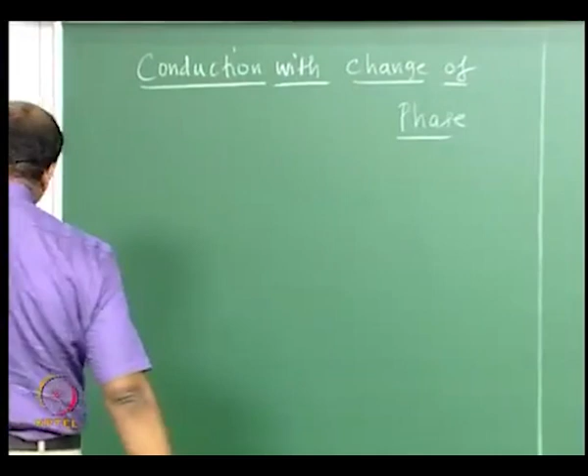As you can very well imagine, melting and solidification take place in a variety of situations in life: melting of ice, making ice cream, processed food, dairy industries, preserving blood in the blood bank. There are many applications, from ice cream making and so on.

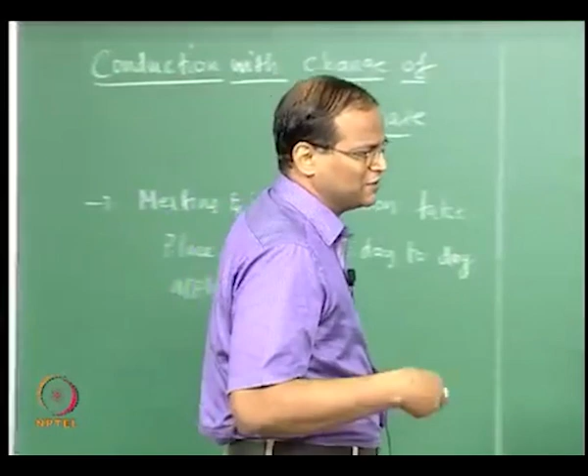Melting, solidification and freezing occur in a lot of applications. As far as metallurgy is concerned, it is full of melting and solidification, where depending on the heating rate, heat treatment is involved - of course heat treatment may not always involve change of phase, but sometimes it does. In metallurgy they also have phase transformation, austenitic stainless steel, martensite and so on, so they are obsessed with this melting and solidification problem.

As far as heat transfer is concerned, more than melting and solidification, change of phase from liquid to vapor and vapor to liquid frequently occurs in heat exchangers.

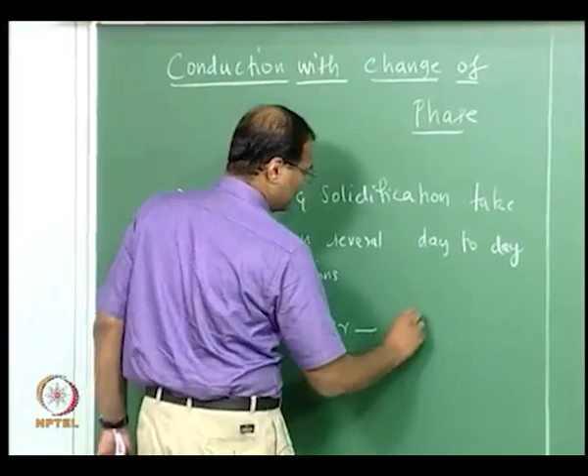Most importantly, latent heat storage devices - you want to store solar energy using phase change material, using paraffin or something. So what happens is you collect the sun's rays, you heat water, this water is circulated in tubes inside a tank. In this tank you have paraffin or wax, the heat is transferred to it, so from solid it becomes liquid, and it stores energy like this.

Then during the night you again send the same water through these tubes, but that water will be cold water and it will get hot - you will get hot water. So one may ask, what is the big deal, why do you want to complicate things, why do you want to use paraffin, wax and all that?

The simple logic is that the melting heat, the latent heat, is much more than the specific heat, and latent heat transfer takes place without any temperature difference. It's isothermal. So from the second law, from a thermodynamic point of view, it is the most efficient way of transferring heat. In fact, the goal of heat transfer is basically to reduce delta T - we want to maximize the heat transfer performance, we want to keep on increasing H, because Q is equal to HA delta T.

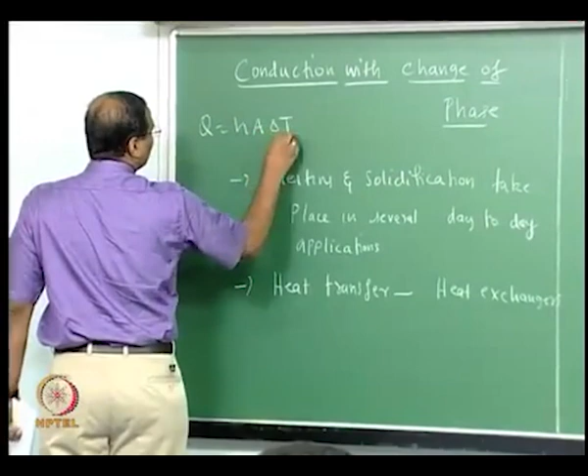So if Q is fixed, we want to keep increasing H so that delta T comes down. If you are able to accomplish heat transfer at delta T equal to 0, that is the best you can hope for. So this energy storage with phase change materials offers that opportunity.

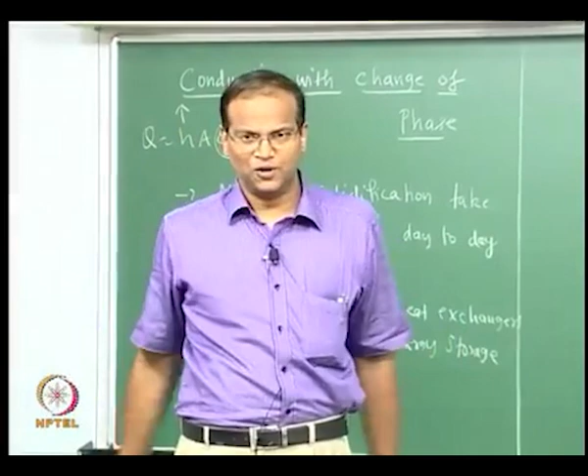Energy storage, welding, casting - all your foundry business. In casting you pour some hot liquid into the mold, then you get the object you want - aluminum casting, die casting, all this - so casting and welding. So in all these applications you have conduction with change of phase.

Therefore it is important to know how to model conduction with change of phase. Up to a certain level we can model it analytically, beyond that we have to model it numerically. So what are the key points?

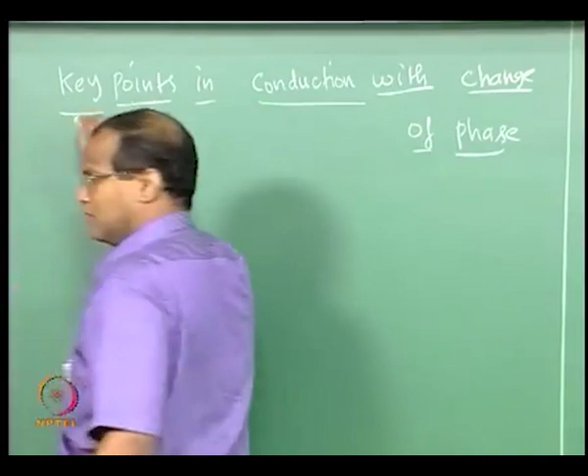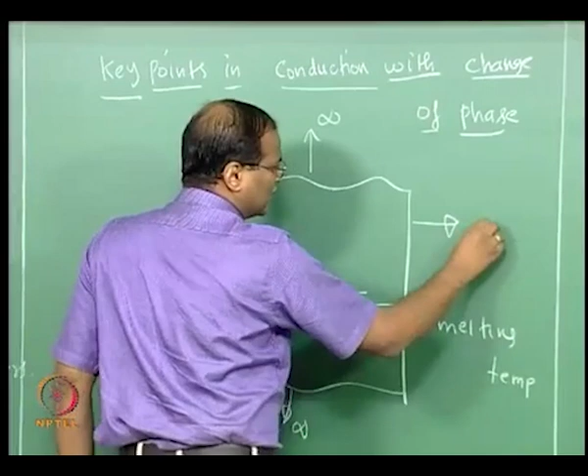Let us consider a situation where there is a solid, the whole solid is at a temperature Tm, Tm being the melting temperature. Of course it is infinite in this direction, it is also infinite in this direction, therefore it is known as semi-infinite.

What is a semi-infinite solid? Only the left side is specified, the right side is infinite. One may ask, sir, how can you get semi-infinite? Semi-infinite means the amount of region in which this melting activity or heat transfer activity is taking place, in relation to the dimension of the body, is very small - that is why it is semi-infinite. The body is 30 centimeters thick, but you are talking about the first few millimeters where this melting has started - you are still talking about the early regime of transient conduction. So it is semi-infinite. What is the semi-infiniteness there?

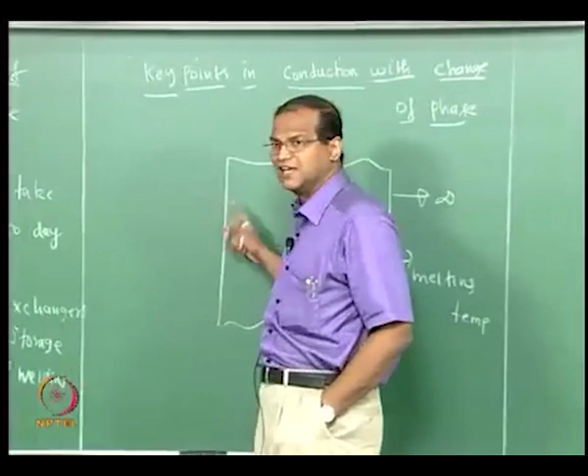Most of the body will not know that some disturbance took place at the left boundary, so it will continue to sit at its initial temperature - that is semi-infinite. Slowly it will get affected. This is what we discussed earlier in this course, where I explained delta, the penetration depth - how much the thermal disturbance will propagate. Delta can be found using the similarity variable x by 2 root alpha t, all that we have discussed.

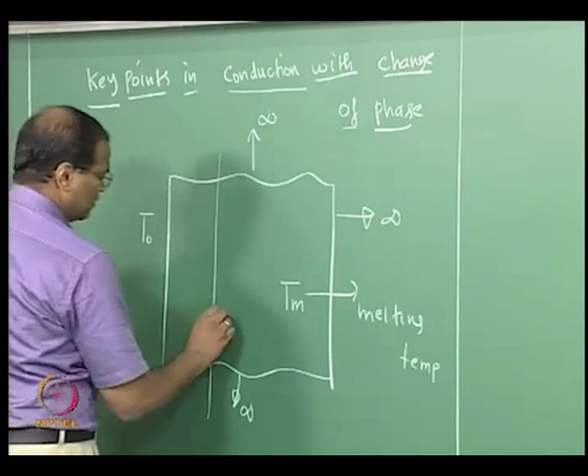Now let us say that suddenly on the left side you raise the temperature to T naught. So this Tm - previously everything was a solid, and T naught is greater than Tm. And x is like this.

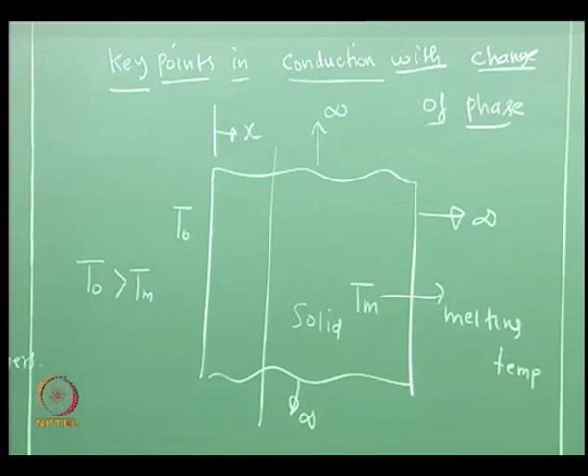Is the situation clear to everybody? So where will the melting proceed? Tm is the melting temperature, T naught is greater than Tm, so the melting will start from the left to the right. So here you will have the liquid region. Now, since this was at Tm and has not melted, it will continue to be at the temperature of Tm, and here it is T naught - the temperature will decrease like this, correct? So this will be the temperature profile inside the semi-infinite solid when melting takes place.

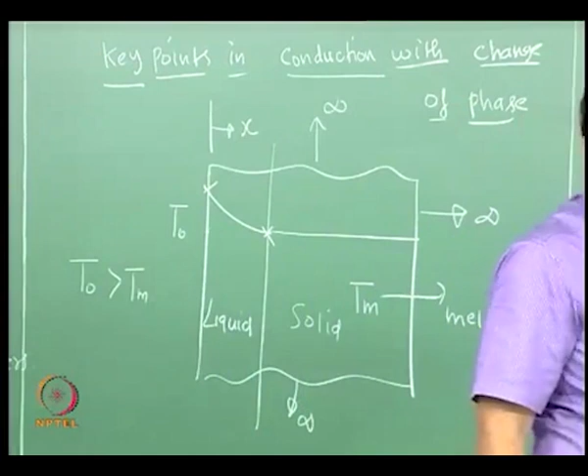What is the key engineering result we are trying to seek? The key engineering result we are trying to seek in the problem of melting and solidification is, number one, what is the position of this interface with time? What is the interfacial velocity - how fast is the melt front moving from left to right? Second, once you have captured the melt front, within the melt front how is the liquid temperature changing with x for various instants of time. So these are the key engineering results.

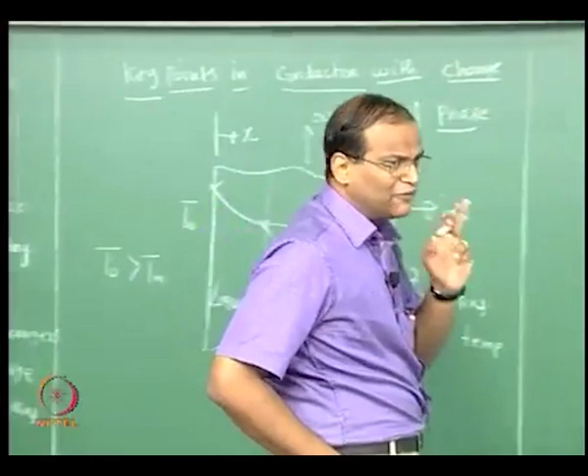Therefore the interface is not fixed - if this is the interface, the interface is a function of time. We want to know what this S of t is - that is the key engineering result we are trying to seek.

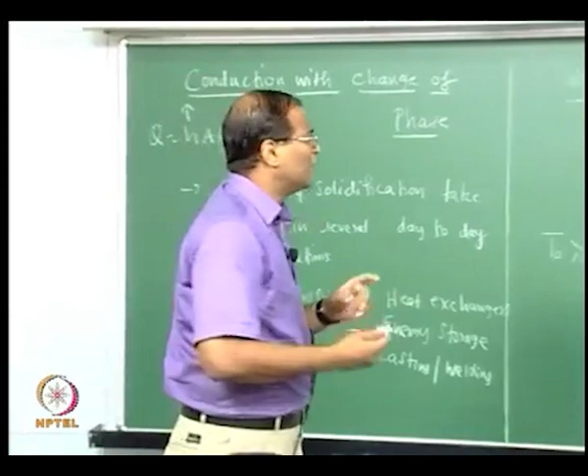What are the key points? First, whether Tm is a single temperature, or there is a region, a range of temperatures about which the melting takes place - that means it starts at 37 and ends at 39, then we are in trouble. Then you won't have such a sharp interface, you will have some mushy region - half melt, half liquid, 25% melt, 75% liquid, like that - and you have to model that mushy zone also. Obviously you can very well imagine that if Tm is not specified at one point, but there is a small range for Tm, then it is much more difficult.

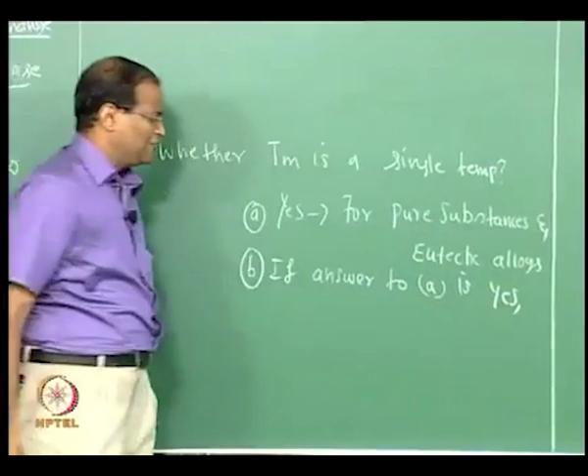So whether Tm is a single temperature - yes, for pure substances and eutectic alloys. If the answer is yes, then we have a sharp interface - left side is liquid, right side is solid. That is issue number one. Obviously in this course I am going to consider only a pure substance or eutectic alloy which has got a sharp interface, only one melting temperature.

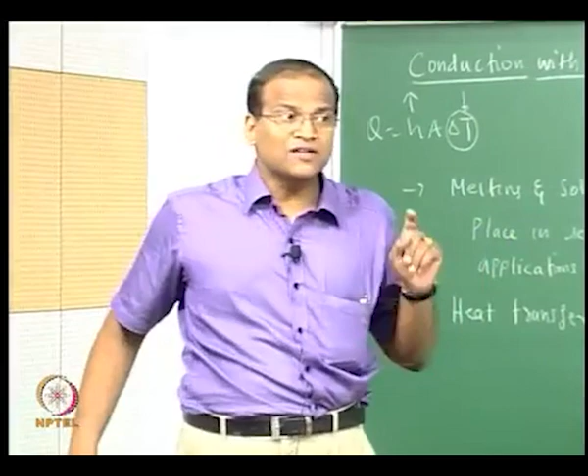This is also called the interface or the melt front, freeze front or melt front. At the interface, temperature is continuous - correct. Whether you are approaching slightly from the left side or slightly from the right side, the temperature will be Tm, but heat flux will not be continuous.

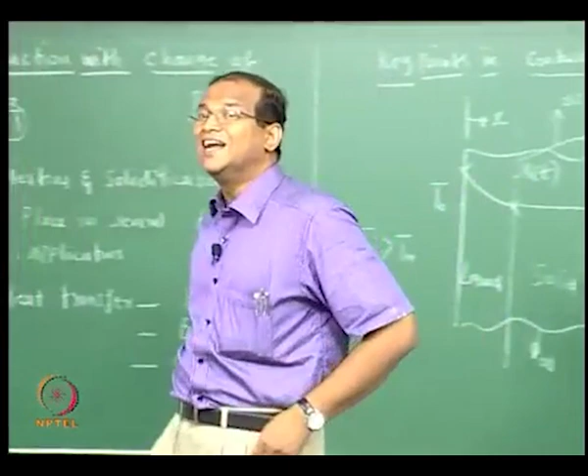This is a major difference between normal conduction, which you study, and conduction with change of phase. Lot of people will think, sir, what is a big deal if melting takes place - there is an additional resistance, it can be treated like an additional resistance because there is a finite amount of heat involved in melting, and then the solid will become liquid, then you can continue with the process. Why can't you model that melting phenomena as a contact resistance and have a resistance network and proceed?

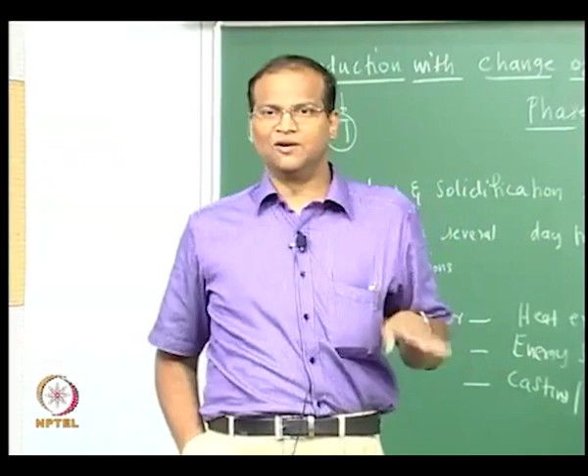You cannot model the melting and solidification with simple formulas, with simple approaches which you learnt in conduction without change of phase, basically because minus k dt by dx from the left side is not equal to minus k dt by dx on the right side. Minus k dt by dx on the left side is equal to minus k dt by dx on the right side plus whatever heat is generated because of the energy transfer that takes place due to the phase change - that we will model.

That is the first thing we have to learn, developing the interface condition, that is called the Stefan condition. Stefan found this out. How do we model this? Okay, so is the situation clear?

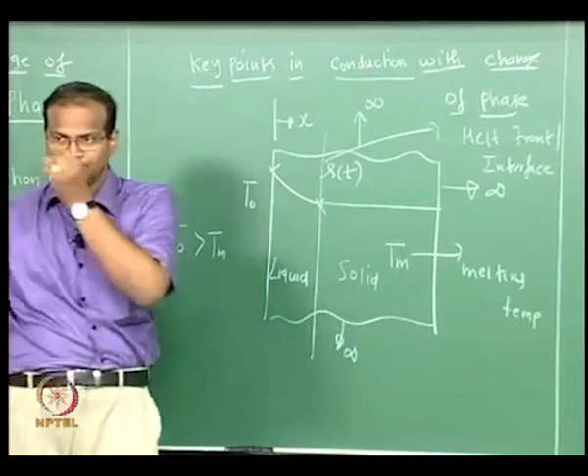So the key differences are the temperature is continuous, heat flux is not, and Tm need not be a single temperature, there could be a range, then you have a mushy zone, that means some region where melting starts, some region where melting ends. Okay, that is much more difficult to solve.

It can be modeled using software or you can write your own codes, but if you do not worry about that, consider a single temperature which is okay for pure substances, eutectic alloys, you can attack the problem analytically.

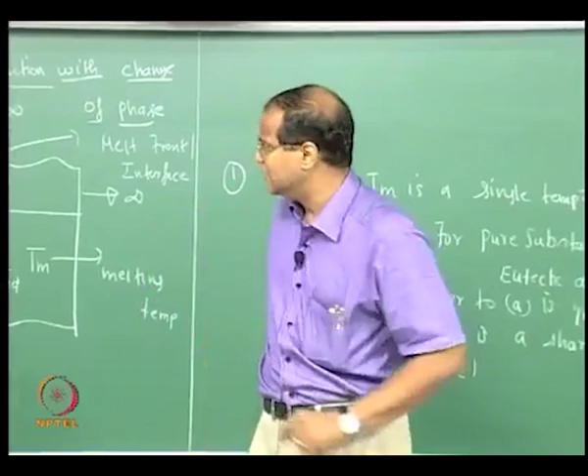Now we have to get this interface condition, that is very critical. Shall I erase this? Okay, let us consider this itself. Now let us consider this interface.

Consider a thin slice control volume around this interface. We are going to study the story around this control volume. So there are several ways in which you can consider this. Now we can assume, you can use a control volume, you can use a Lagrangian approach or an Eulerian approach, right, to figure out the state of affairs happening within the control volume.

There are two things which are taking place. There is a transfer of mass and there is a transfer of energy. So you have to model this transfer of mass.

Now we can assume that the interface and the control volume surrounding it are stationary, but material is just coming from left to right, or coming from right to left. For example, material is coming as solid from the right, entering the control volume as if it is some process, as if it is some machine. Material is coming from right, getting melted, exiting as liquid.

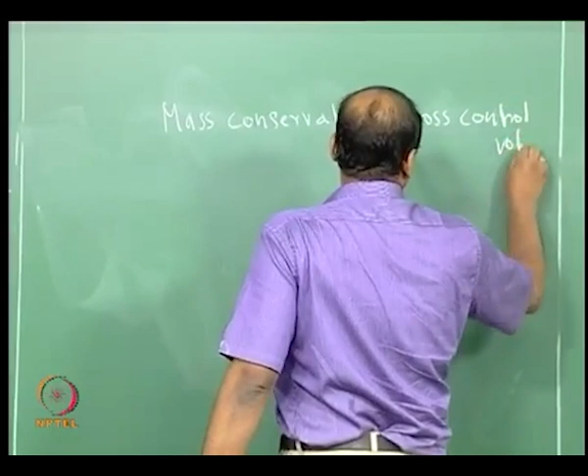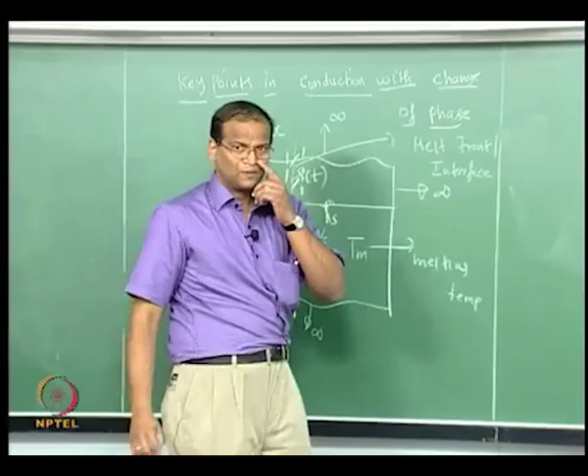You can consider the area of cross section to be A. So rho L, rho S, A is the same, then velocity. What is this velocity, sir? This is that velocity which is actually the velocity of the front.

Okay, now what can you say about this? Now rho L VL into A is equal to rho S into Vs into A.

So what is the funda here? If rho L is different from rho S, in a particular instant of time 5 centimeters of solid thickness may translate to 7 centimeters of liquid depending on the density. That is what I am trying to say. If both the solid and the liquid phase have the same density, it will get cancelled, does not matter, but when it melts the density could be changing, but the mass has to be conserved.

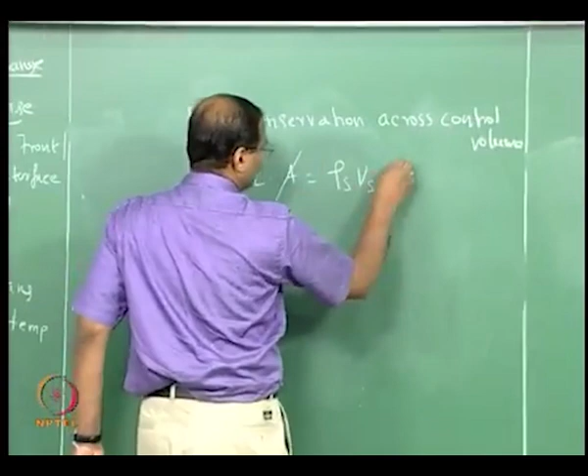So we should not make the fatal assumption that the velocity at the liquid side must be equal to the velocity at the solid side, but rho L VL equal to rho S Vs. Okay, is that clear? Of course many materials rho L is equal to rho S and we knock it off, then we do not worry, that is another story. Okay, now rho L VL is equal to rho S Vs. So that is the first, it is okay, that is point number 1.

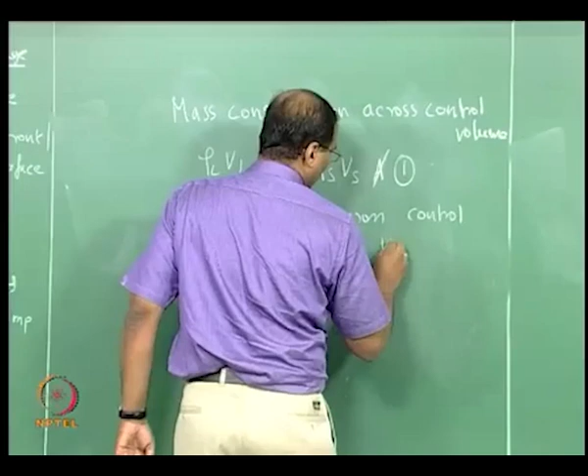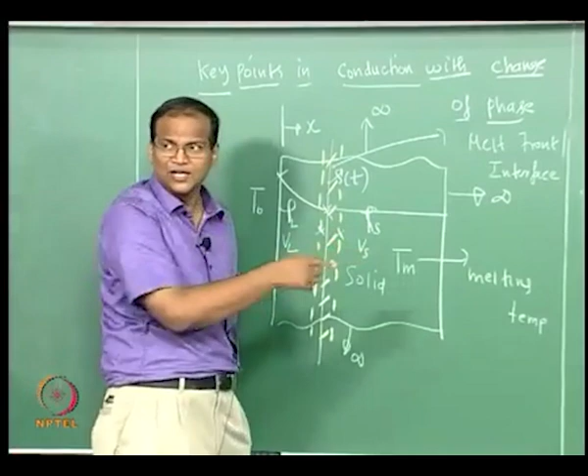If you consider from the left it enters as liquid, oh sorry, from the right it enters as solid and goes out as liquid, that is a melting problem, or from the left it can enter as liquid and go out as solid, that is the solidification problem. So when it is coming, there is a flux, the conductive heat flux, which is coming because of a temperature difference. There could also be a conductive heat flux here, I am just saying that it is at Tm. Initially it need not be at Tm, it can be at some other temperature. Then there could be temperature gradient within the right side also. I started the lecture to make it clear.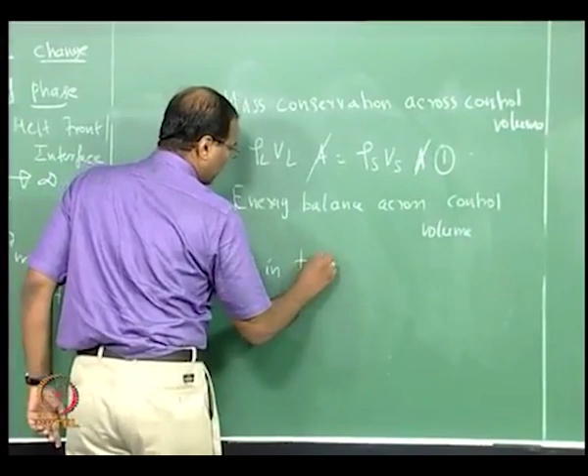So there could be conductive heat fluxes on both sides. Then this liquid is coming with an enthalpy of HL. This solid is coming out with an enthalpy of HS. Therefore the energy balance demands that whatever is conducted in plus whatever enthalpy is brought in must be equal to whatever conducted out plus whatever enthalpy is taken out, correct. So these two are critical, right. Now how can you do this? Q, okay, what is Q conducted minus K?

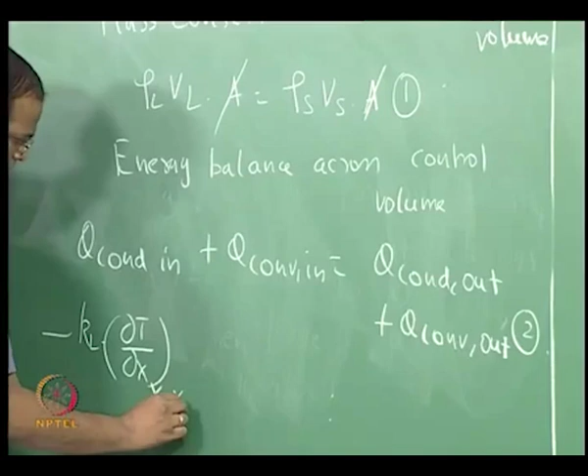dou T by dou X... you want to take, or you can cancel, or you will cancel, plus

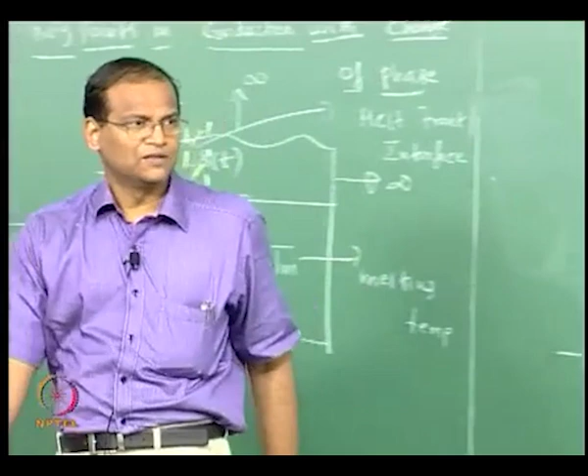rho S, you put it as rho L, okay, rho L is convection. We treat it as convection, enthalpy, no, that is enthalpy, liquid enthalpy. So this is equal to minus K solid dou T by dou X, this is liquid and solid, sometimes I may use small s, be consistent, L is liquid, S is solid, plus

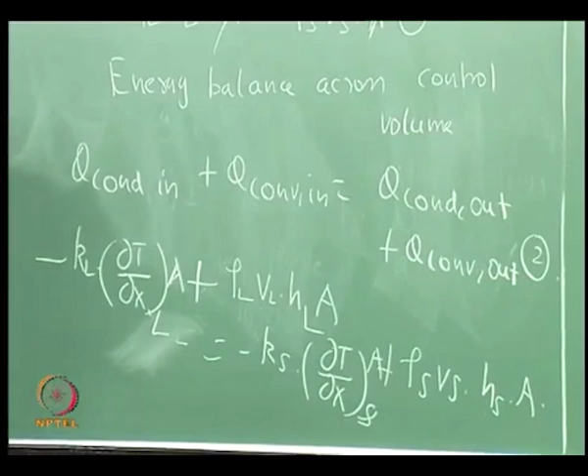A, I am coming to HFG, don't jump to conclusions. Left side is L, right side is S. Now I am saying that HL minus HS is HFG, I am coming to that. Because when it is coming with the liquid left side, across the control volume only this transformation takes place. I cannot straight away put HFG when I derive.

What is the fundamental principle? How do you get that equation if you ask? Suppose I straight away write minus KL dt by dx is equal to minus Ks dt by dx plus HFG, you will ask me, sir, how? I am explaining how that HFG is coming, okay.

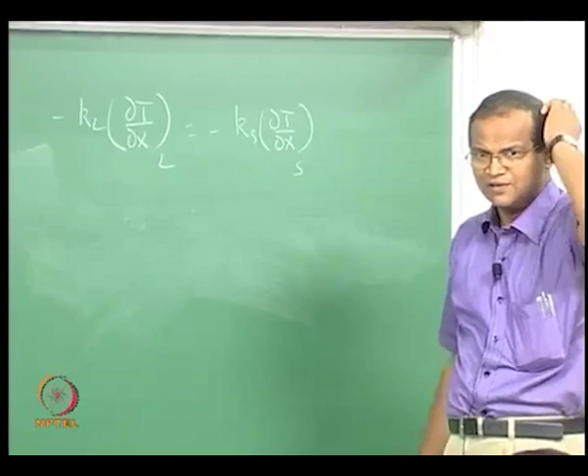Now we can do what you are saying, so minus KL of the liquid is equal to... usually the liquid has more enthalpy than the solid, or HL minus HS, what do you do? HS minus HL, that is what you want to do, okay. Now what is the beauty? Rho S Vs is equal to rho L VL, okay. So this is

that is your HFG, we do not say HFG because HFG is for water. I put HS minus HL, is that correct? I knocked off the A, okay, is it correct? Okay, this is called the interface condition, very important.

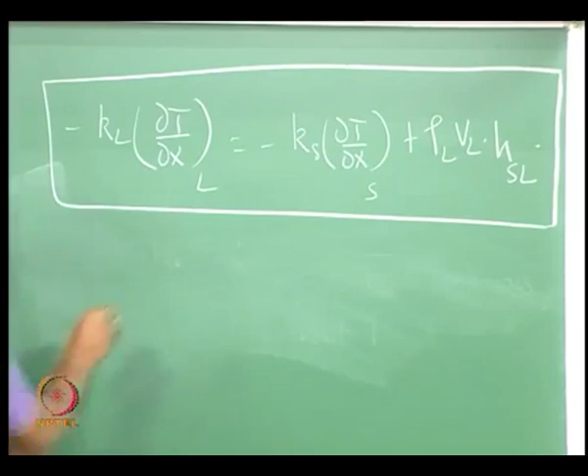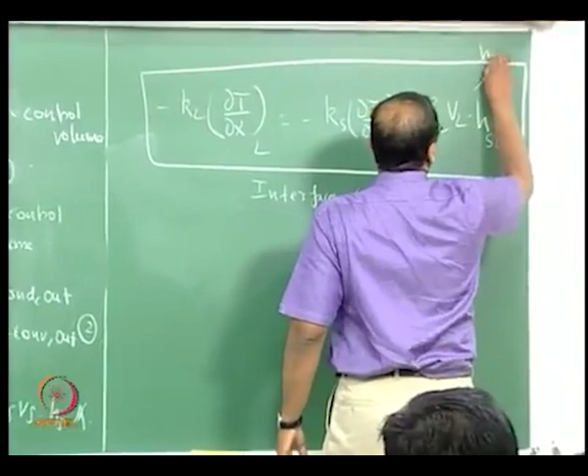Now are you confident that HSL is positive? Are you confident that HSL is positive? That is why I am also, no, there is nothing wrong in what we have written. That is why, is that correct, or did I make many mistakes?

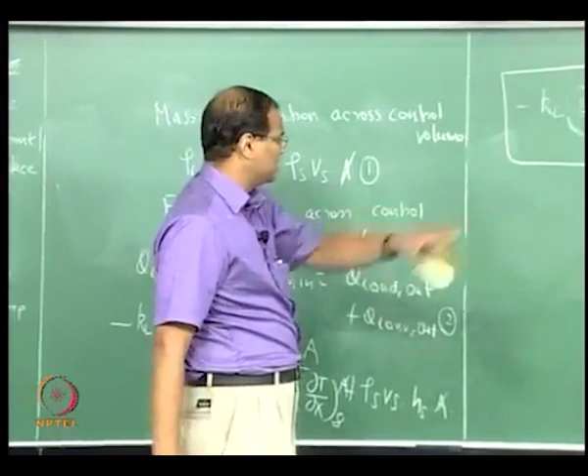Plus, okay. Now HL minus, is this correct? That is why I do not want to get a negative value. Will that HLS be positive or? Yeah, because that is no.

No, HFG means fluid to, Hg minus Hf, gas to, so liquid to solid. Yeah, liquid will have more enthalpy. That is why if you bring it like this, it is Hs minus Hl, we call it as HLS, we put a minus sign. Now it sets it to rest. Okay, this is called the interface condition.

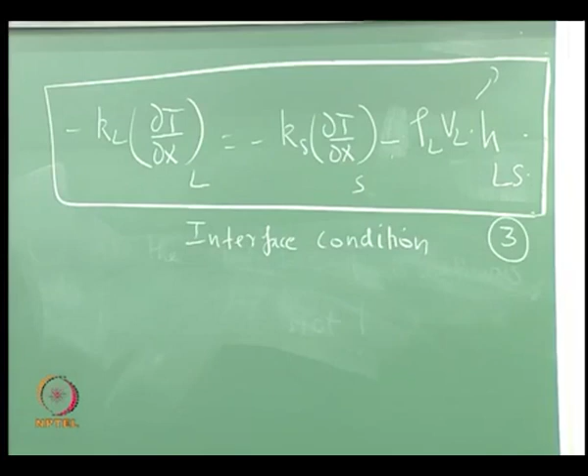Now you have to solve the conduction equation with this interface condition, that is the added thing. So the first half an hour what we did was we derived this interface condition. Without this interface condition you cannot proceed. Okay, right. Now what about the interfacial velocity?

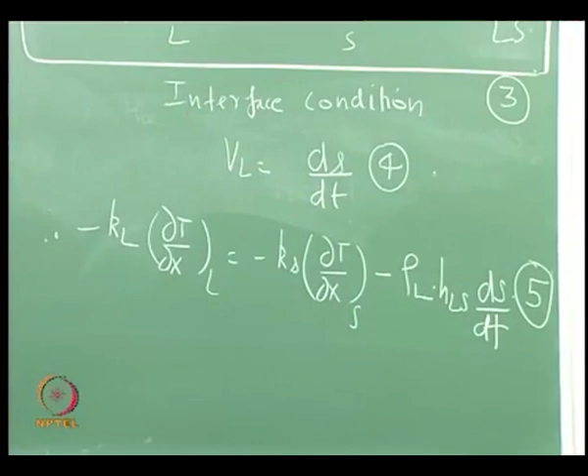The VL can be considered to be ds by dt, where S is the location of the interface, where S is the location of the interface. Therefore this is the interfacial velocity.

So apart from the time which enters the unsteady conduction, the time enters the interface condition. Okay, so now this condition we have to use.

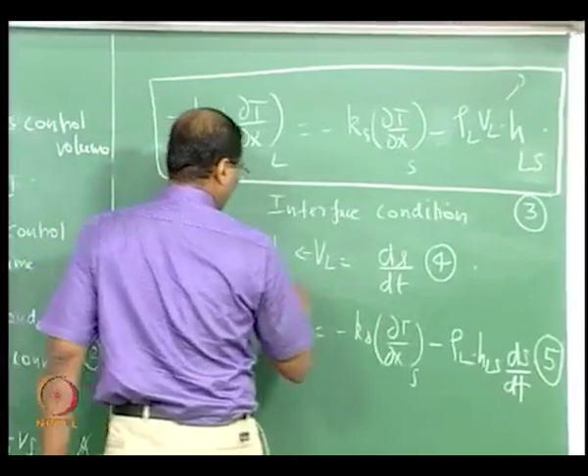So equation 5 is valid for both melting and solidification. If you want you can write equation 5 is valid for both melting and solidification. Now let us consider the Stefan problem. What we considered a little while ago is the Stefan problem.

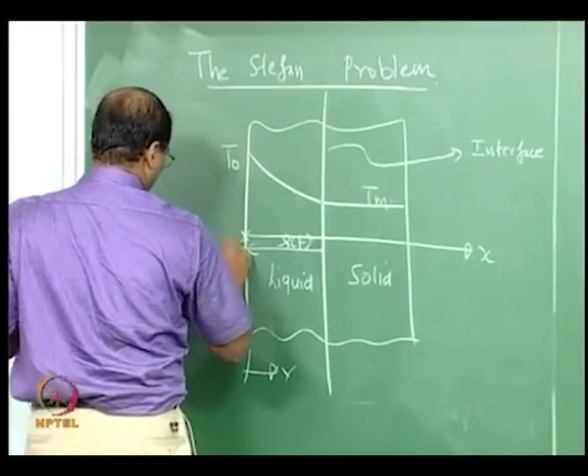So consider the melting of a semi-infinite solid. The whole of the solid is at a temperature of Tm, where Tm is the melting temperature, for times T less than or equal to 0, up to time T equal to 0. Now at time T greater than 0, for x equal to 0, T is equal to T naught.

T naught is greater than Tm, that is, the left boundary's temperature is raised above the melting temperature. Therefore melting has to start in the solid from left to right. Now as time elapses the melting proceeds from left to right.

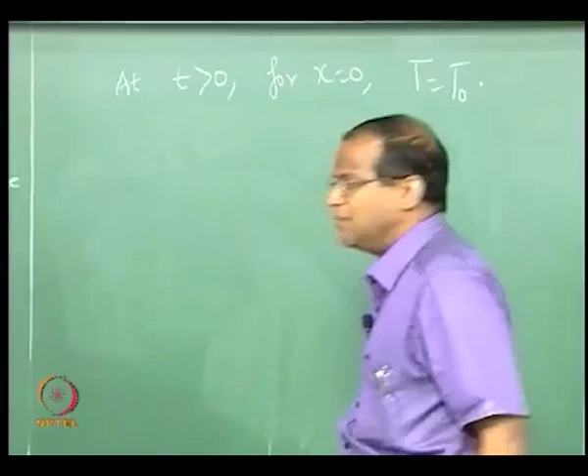Now we have to solve for the conduction in the liquid. Beyond this region it is only solid which is at a temperature Tm. So I do not have to solve the equation of conduction inside the solid, I have to do it only if there are temperature gradients within the solid, but fortunately there are none, because it continues to be at Tm in these initial stages of melting. Therefore we have to solve only the conduction equation on the left side of the geometry.

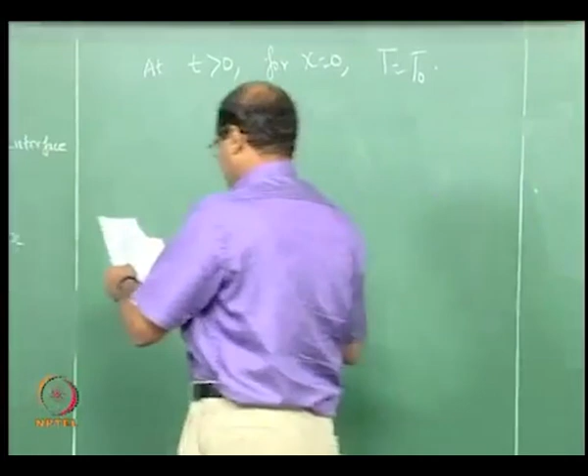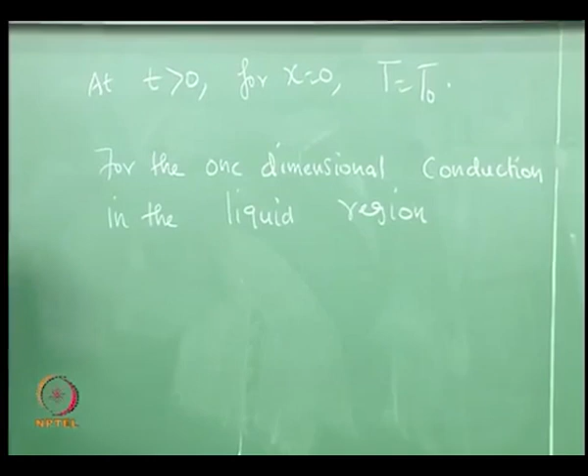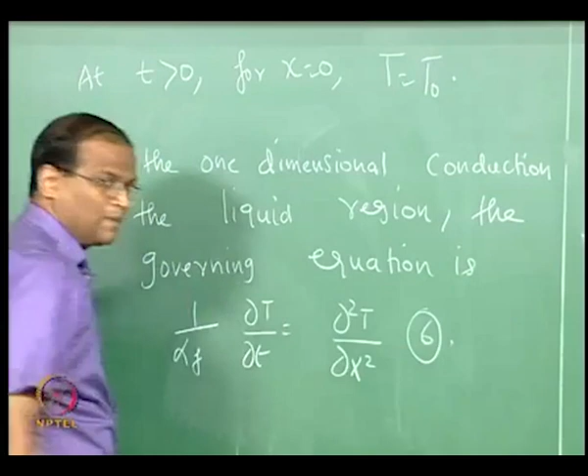So for the one dimensional conduction in the liquid region, the governing equation will be 1 by alpha L times... so we call it equation 6. This is the transient one dimensional unsteady heat conduction equation which we are aware of.

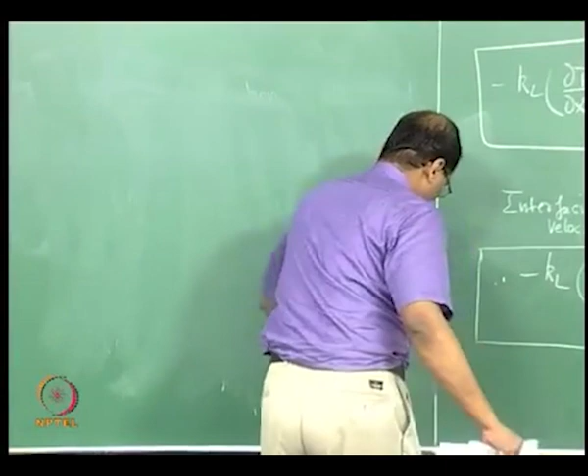It supports two boundary conditions in x and one initial condition. So the initial condition is: for all x, at t equal to 0, T is equal to Tm.

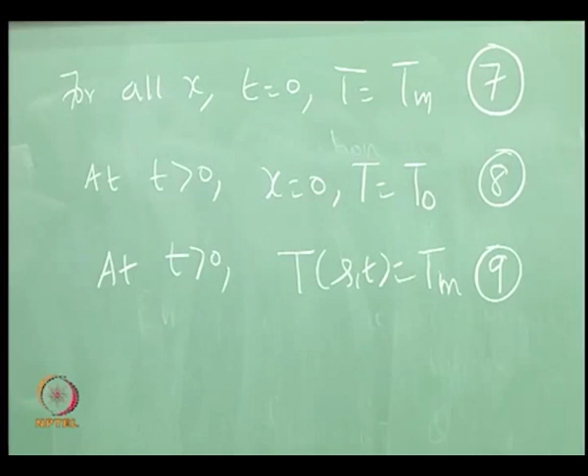So one initial condition and one boundary condition are given. What is the third boundary condition? x is the spatial coordinate, t is the time. At any time, at x equal to s, T equal to Tm. Therefore the solution can be worked out only up to x equal to s.

Now the difficulty that arises in the problem is s is not known for us because s is a function of time. Therefore s has to be obtained as a part of the solution. In fact, how s changes with time is the key engineering result we are trying to seek, because from an engineering point of view, how fast or how slowly the melt proceeds is the information we are seeking.

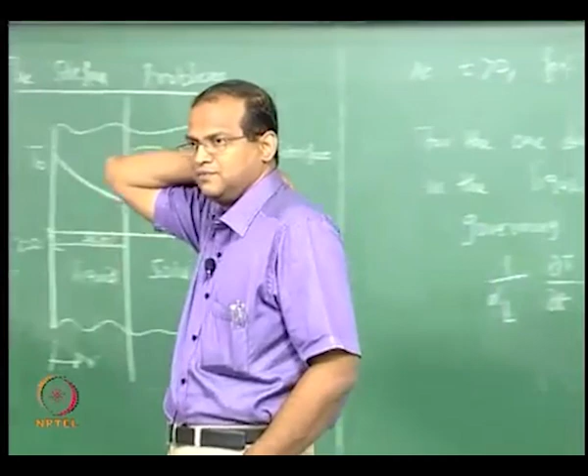So we do not know what this S is right now, but one thing is very sure: in order to find S, one more condition is required. That one more condition comes from the interface condition.

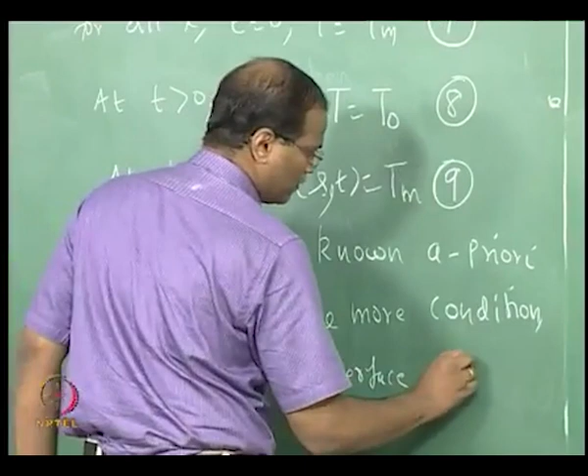Now in that interface condition, what is dT by dx of the solid? Is there any temperature gradient in the solid? No, because the whole solid is at Tm, therefore the interface condition can be simplified for the Stefan problem. Now for this problem, because there are no temperature gradients within the solid, it continues to be at Tm.

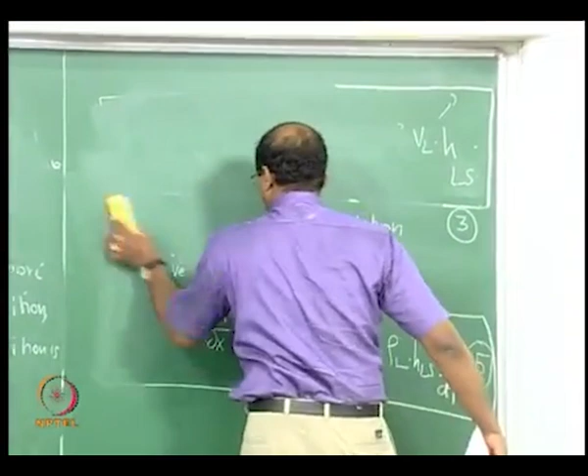Minus KL... no, rho minus or plus? Minus rho L, okay, plus rho L hLS into ds by dt. That's it. No, we have not solved it, but from this you get S. It's not so easy, so we will see that therein lie some fundamentals.

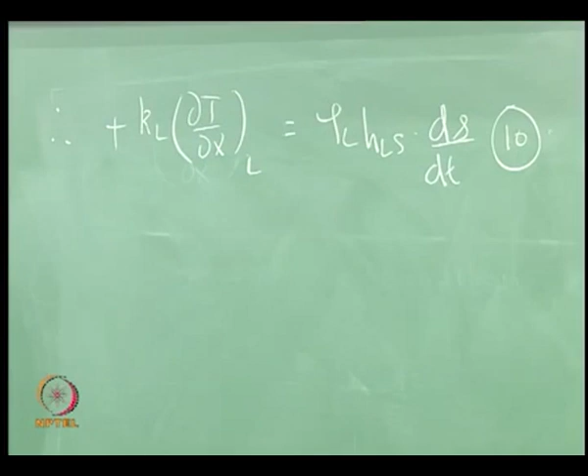Now we have correctly formulated the problem. There is nothing wrong in the formulation, whatever physics is there, whatever mathematics is there, we have incorporated. Now we have to seek a general solution to the problem with the boundary condition, initial condition and the interfacial condition. We have to find the solution to the Stefan problem.

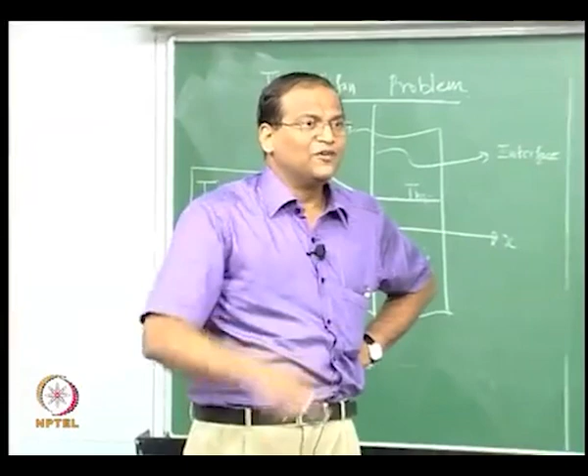Now this is conduction in a semi-infinite solid, do not worry about the melting front and all that. As far as the left side is concerned, it is basically conduction in a semi-infinite solid, that is the initial portion. For the initial portion I have told you that we can introduce a similarity variable, though I may not have worked out the full similarity solution in class. In the course I have already told you that x by 2 root alpha t can break this down, can convert this PDE into an ODE, and you can get a solution in the form of an error function.

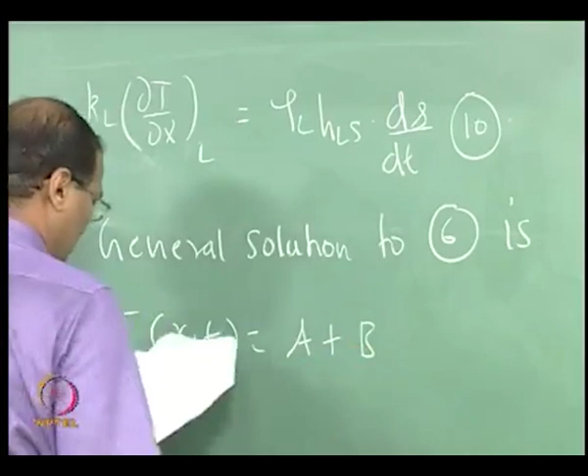So the general solution to equation 6 is given by T of x comma t. I do not have time to derive that here, but it can be shown that once you have eta equal to x by 2 root alpha t, you can substitute for eta here and then this will convert into an ODE, and in just another 10 or 15 minutes you can show that the PDE is converted to an ODE and the solution for that ODE is given by the error function.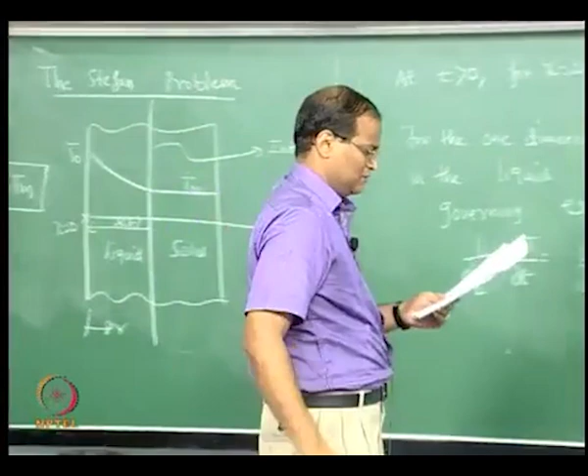Now the error function of x is given by 2 by root pi... don't worry, on the right hand side that integral, the variable under the integral sign can be anything, it can be alpha, beta, gamma, it is a dummy variable because you are substituting from 0 to eta. Now, so this is equation 12.

Now slowly, one by one, you have to get the constants A, B, as well as S. Okay, we will do that slowly.

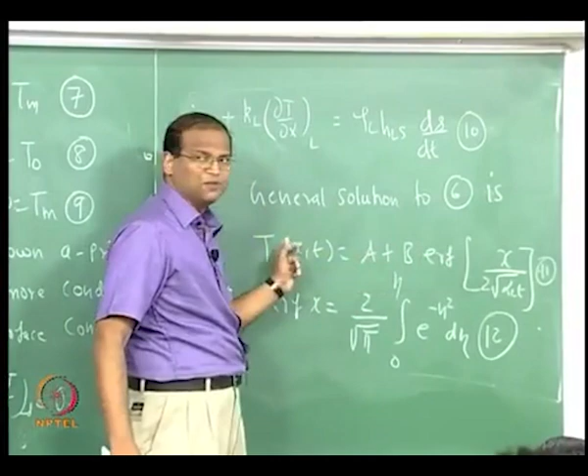What is the error function of 0? Integral from 0 to 0, error function of 0? It's 0. At x equal to 0, what is the condition? T equal to? Error function of 0 is 0, therefore this term vanishes, therefore A must be equal to T naught.

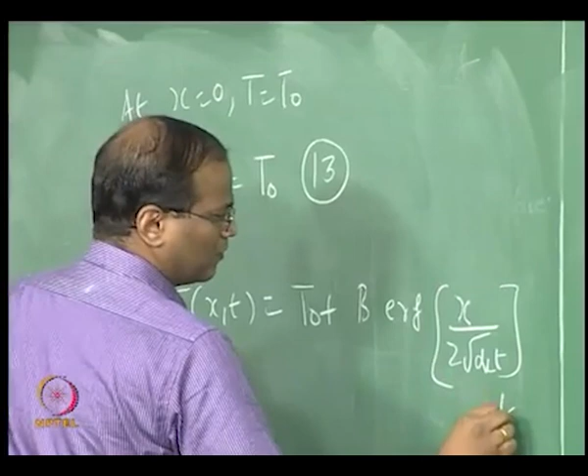Okay. At x equal to S, what is T? Very good. At x equal to S, T equal to Tm, because that is the place where there is a melt front of the interface. Now Tm...

Error function of, tell me exactly, error function of S by... correct. Therefore B equal to Tm minus T naught. Okay, therefore...

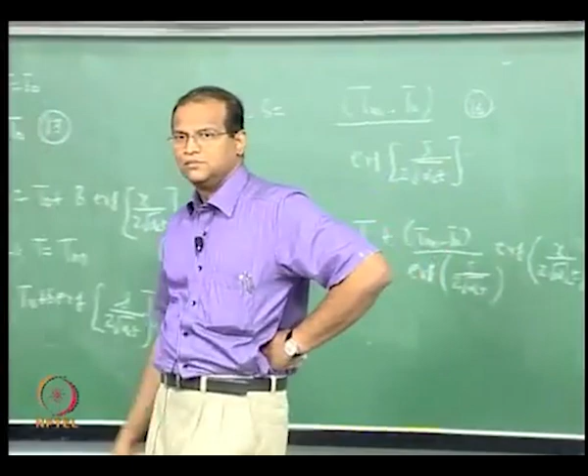Tm is known, T naught is known, alpha L is known, time is known. If you give the position of x, it is possible for you to calculate the error function of x. You can solve the problem provided you know what S is, but you do not know what S is. So the problem is not over. You are able to understand that?

This solution is valid only up to S. You can work out a temperature profile only up to S. Beyond S, the body is at a temperature of Tm, but that S itself is changing with time. Unfortunately, the solution has S, and I do not know what the S is.

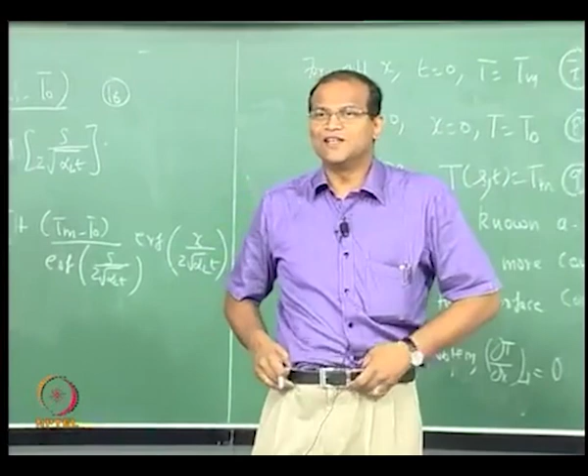But I do not have to lose hope because my interface condition is there. So that interface condition, if I substitute my general solution, because k dt by dx is there at the interface, so if we substitute k dt by dx, the only unknown in this is S. Left side also I will get S, right side also I will get some function of S, I will get an ordinary differential equation in S. If I solve the ordinary differential equation in S, I can go home.

So much for the simple Stefan problem. Okay, now let us substitute the interface condition and stop. We will work out the solution in the next class. Okay, now we will just, is this clear?

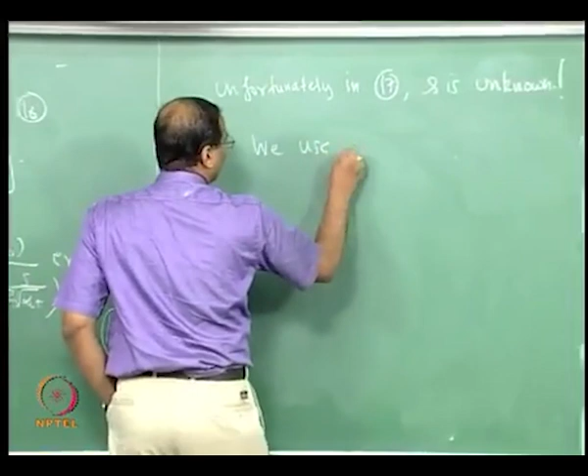What is the problem? Okay, therefore what you have to do is we use equation 10. Yeah, please start differentiating minus KL.

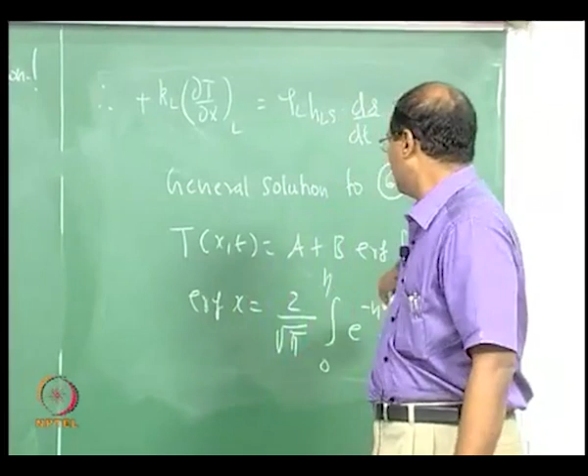What is the integral of the error differential, the differential of the error function? The differential term goes, so you will have 2 by root pi, e to the minus eta square. You are applying at x equal to s. So...

It is not threatening us. Some error function of s is there, e to the power of s square is there, ds by dt is there. Where is the hope? I want to get s as a function of time. Okay.

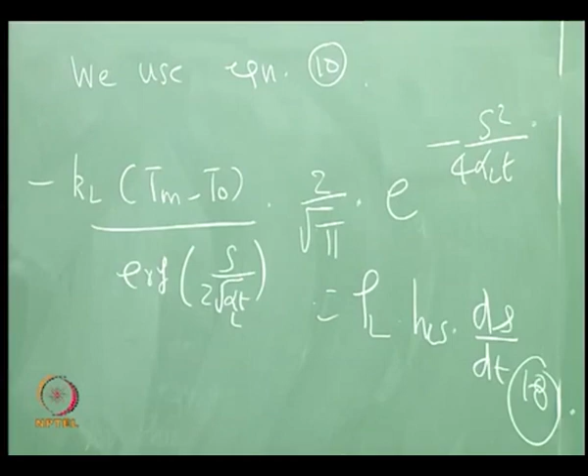If you solve equation 18, you will get s as a function of time. The dependence of s on x is gone because we have substituted, we have worked out the interface condition at x equal to s. Okay, fortunately, it is known...

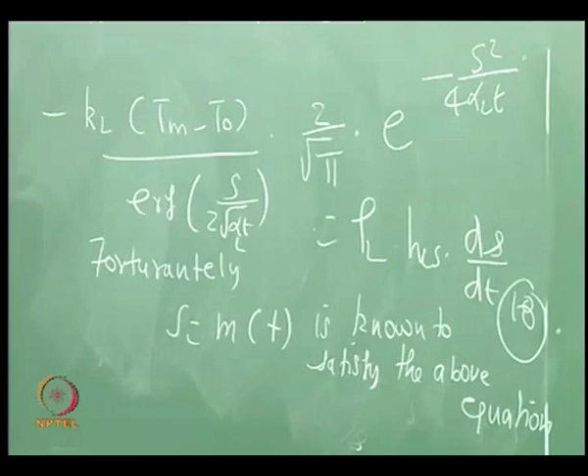Fortunately s is equal to m of t is known to satisfy the above equation, where m is a parameter which depends only on the properties of the medium under question.

Okay, so you can substitute s is equal to m of t there, and then the resultant equation will be put in terms of m, and you solve for m. Once you solve for m, then this is for m into root t, m into root t is known to satisfy this. So if you substitute s equal to m into root t, the whole thing can be solved and you can find out the solution, and that completes it. We will work out the solution in the next class.

Okay, so how do we get this? That means what it means is the s goes as t to the power of half, that is intuitive, just like the boundary layer, it grows as t to the power of half. Okay, we will see from an integral analysis how that is actually true, and then we will work this out and get the value of m, solve it, then we will complete the solution in the next class.